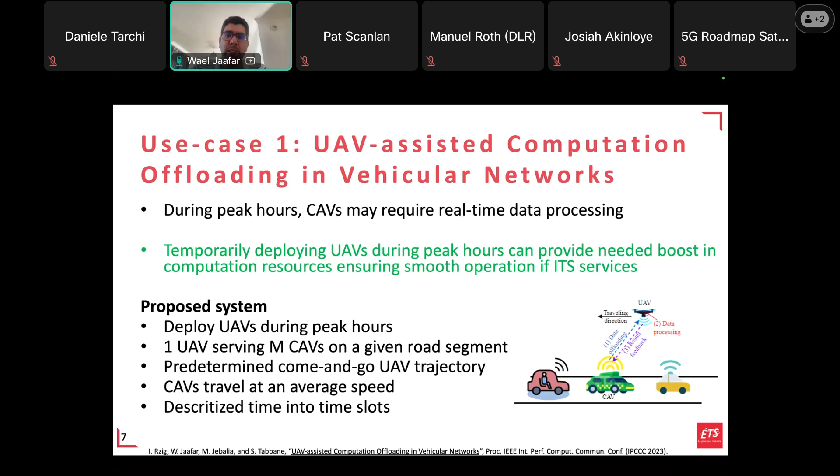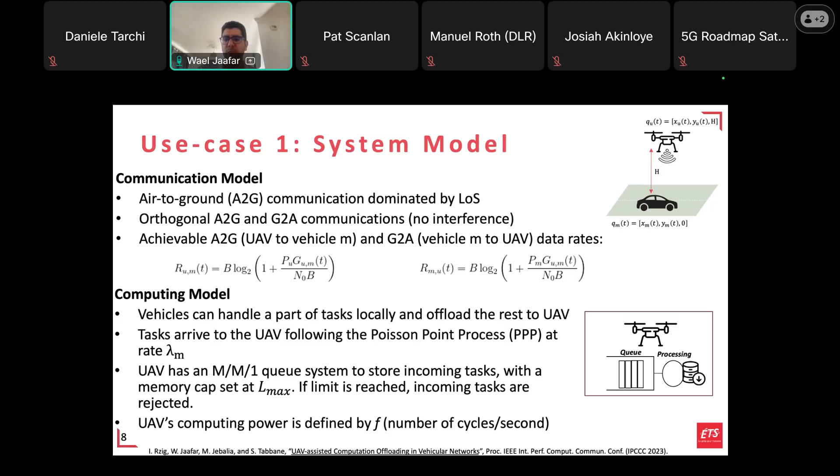What we did here is consider the communication between the drone and the vehicles. We considered a dominant line-of-sight link because you don't have obstacles or shadowing between them. And we have a computing model where computing tasks arriving at the drone enter a queue and are processed one by one. We consider the system simple, with first in, first out for tasks.

Based on that, we have to analyze the energy consumption and the delay, because these are the most important things here. For the drone, we have task processing energy calculated based on the processing power defined on the drone. It also needs significant energy for flying from one side of the highway to the other. And then we have the total consumed energy.

In terms of delay, what you see here is the achievable data rate using the Shannon formula. But since the vehicle and the drone are moving at the same time, the distance between them is changing, and because of that, the data rate changes over time.

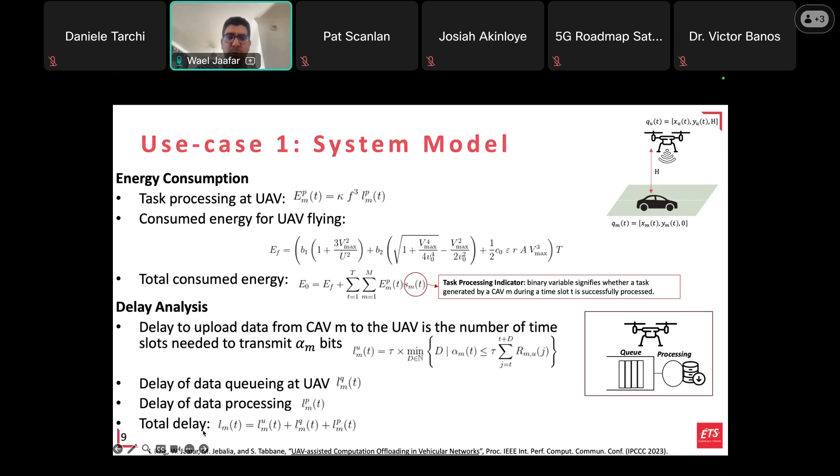So we defined a different way of data rate in order to show that the necessary time that is needed to offload alpha M data from the vehicle to the drone will need to go through a certain number of time slots. So here, of course, we assume that time is discretized into time slots. And then you might have a delay for data queuing, because you might have many tasks arriving to the drone. And also you have the delay for data processing. And of course, total delay is the summation of all of it.

Then what we did is that we formulated the problem of maximizing the task offloading success ratio at the drone. So without looking too much into the equations, we want to make the drone satisfy as many tasks coming from the vehicles as possible. Of course, by respecting the task offloading delay threshold, which is QM. And of course, by respecting that the whole energy that has been consumed respects some battery capacity value.

Of course, I mentioned that we are not optimizing the trajectory, but the only thing that we are optimizing here is the launching point and the launching direction. So actually here it's the launching point location of the drone and the initial flying direction that it will go. And of course, we need to decide on which tasks will be associated to the drone.

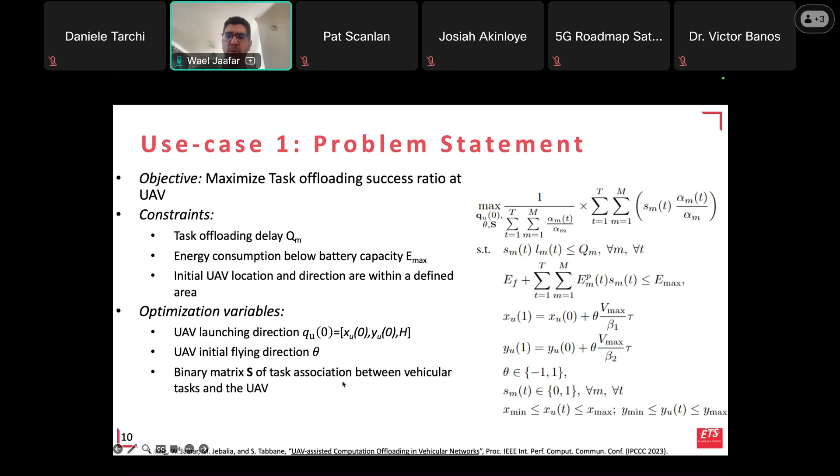So to solve it, we used a simple genetic algorithm task offloading method at first. So I'm not going through the details, but that's the typical solution we have used. Why? The motivation behind it is that a genetic algorithm, even though it's slow in converging, theoretically, if you let it run enough time, it will get you to some optimal or near optimal solution.

And we compared with another, what we call iterative exhaustive linear programming based task offloading approach. So in this one, we have made an exhaustive search over some parameters, which are the launching point and the directions. So we have considered that our segment can be divided into a discrete number of launching points, and we also have right or left direction.

So this was the exhaustive search, and once you fix the initial location and the direction, actually the only problem that is left is deciding on assigning tasks to the drone. And this problem is a linear programming problem. So actually you may use any optimization tool like CVX to solve it.

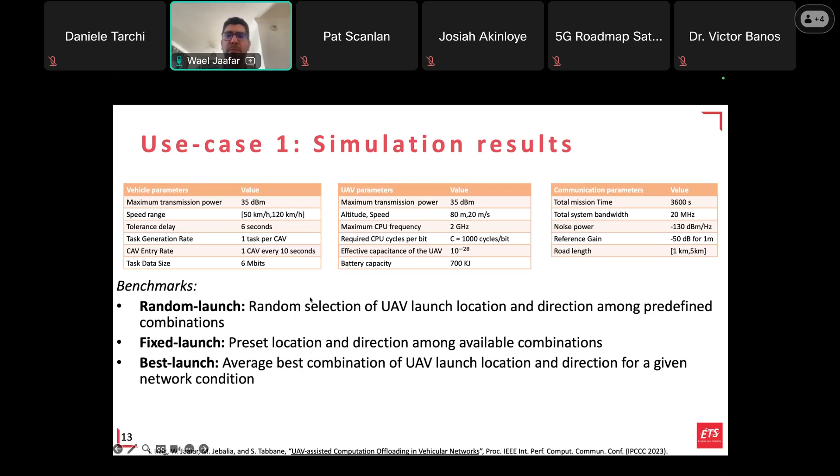So in our simulation, we considered a number of benchmarks where actually we randomly select from where the drone is launched, or actually always preset the same location to be launched. And we took also best launch or average best launch location for the drone. So here we have some parameters. I won't go through all of it due to time limitations.

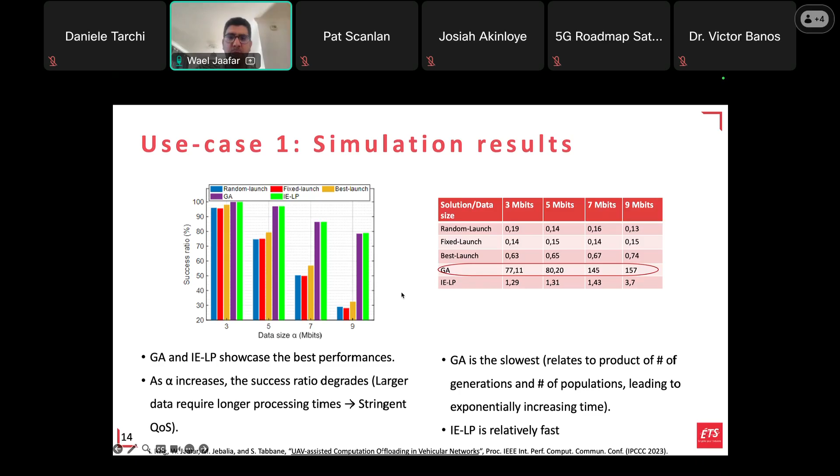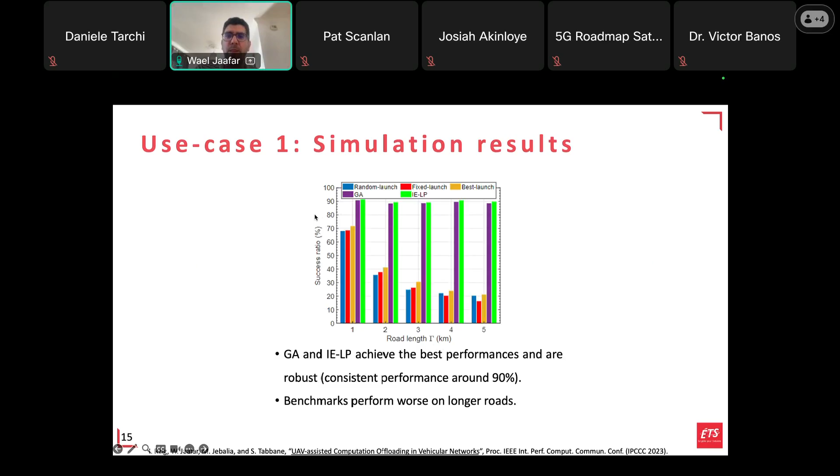We did some more simulations here. For example, different road lengths have been considered. So the highway is either 1 kilometer, 2, 3, 4, 5, with the extremes used by the UAV to come and go. And again, we see that the genetic algorithm and IE-LP are doing great. They are around 90% success ratio compared to the other ones. So that was the first use case with one drone.

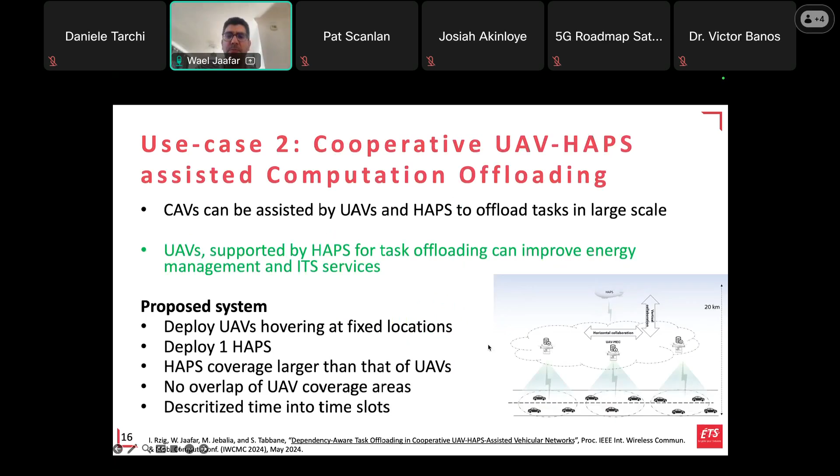So here in the second use case, we complexify the system. So first we considered multiple drones, and we considered that we can cooperate with the HAPS. So HAPS and these multiple drones can support tasks coming from the vehicles. In addition, because of that, there are multiple communication links. So we have the classical communication links with the drone, but we have other communication links between drone and HAPS, and even for feedback between HAPS and the vehicle. So we have more complex links here.

We have considered now not just line of sight. So here we have a probabilistic channel model where you might consider line of sight and non-line of sight links between the drone and the vehicles.

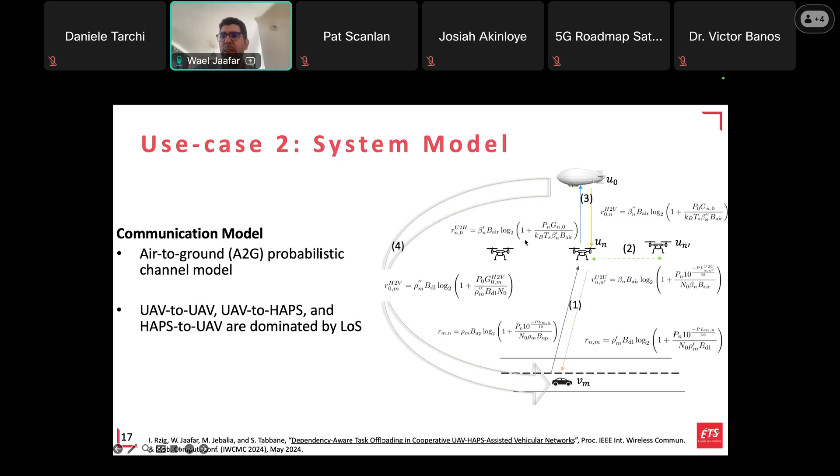And also we have line of sight only for whatever is aerial, between UAVs or between UAV and HAPS.

Here to add more complexity, we considered that a task can be subdivided into subtasks, meaning that to execute a task you have to execute numerous subtasks that have some logical or virtual links between them. So the link can be linear, for example I have 4 subtasks that have to wait for each other to be executed. It can be in parallel, like this way, or it can be hybrid.

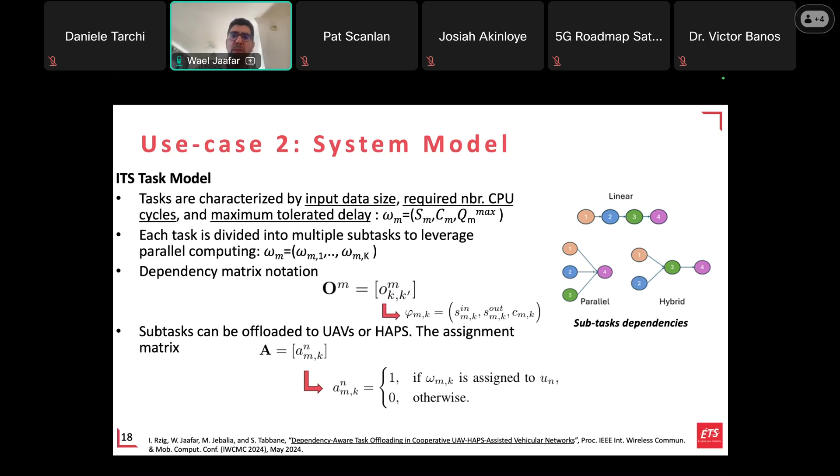This complexifies the problem even more, because now we are not just offloading tasks, but we are offloading subtasks and ensuring that there is the link between them. All of this, of course, will affect the delay of the service. So without going through all of this, just to show you that because of this dependency between the subtasks, you have to account for the time that you are waiting to get the outcome from a previous subtask to execute the current subtask, etc.

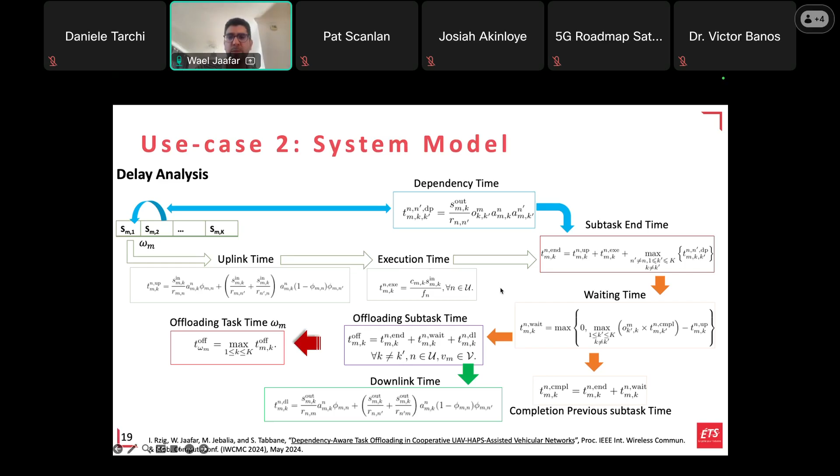So this is just to show you that it's more complex here to calculate the delay. And also, of course, to calculate the energy consumption, we have to account for processing per subtask, plus the energy that we have used here, for example, for feedback. This is something that we added compared to the previous case.

And of course, since vehicles are covered by the UAVs, whenever we have this movement of the vehicle away from the initial drone that was covering it and it goes to another one, you have to account for that in order to get the feedback to the right drone that is covering the vehicle now, after some time. For the HAPS, we have also another equation for energy consumption, which is similar.

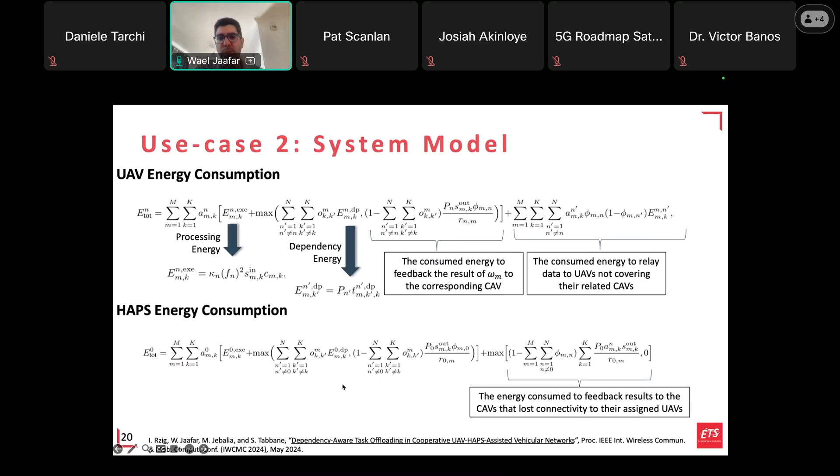Here, the problem is slightly more complex. So we want to maximize 2 things: task offloading, as previously, but also the residual energy of the system, meaning that we want to maximize energy efficiency of the system that is represented by the drones and the HAPS.

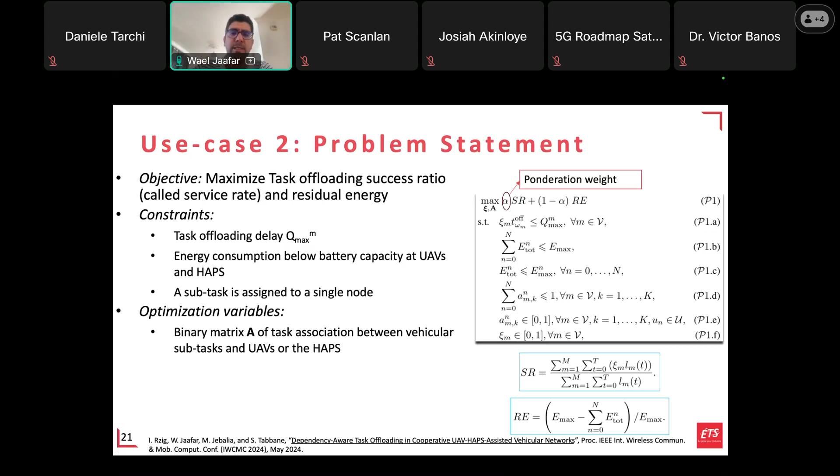Of course, constraints are still the same: the delay threshold, the UAV and HAPS battery capacity, and a subtask cannot be assigned to more than one node. Here, the problem is about task assignment only. So we want to make sure that the subtasks are actually assigned in the best way possible to respect all these constraints and maximize our objective.

So here the solution was based on a genetic algorithm. It is more complex, of course, than the previous case, but we adapted it to our new system.

Without going through all the simulations here, we consider the case with one HAPS, and if I'm not mistaken, we have 3 UAVs. Yeah, I'm just trying to make sure. Yeah, it was not mentioned, but we have 3 UAVs. And then we have some parameters regarding the threshold on the delay. Also, we have divided the subtask into hybrid subtasks here in our simulations.

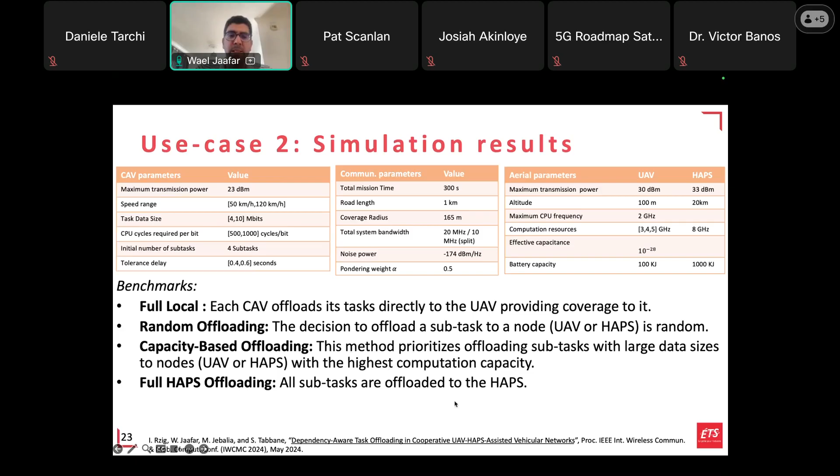Here, benchmarks are different. So we have fully local, where all tasks are offloaded to the UAVs that are covering the vehicles; random offloading, meaning you put it the way you want; capacity-based offloading, where we prioritize putting subtasks in nodes that have higher computation capacity; and full HAPS, meaning we put everything on the HAPS only, so we don't use the UAVs.

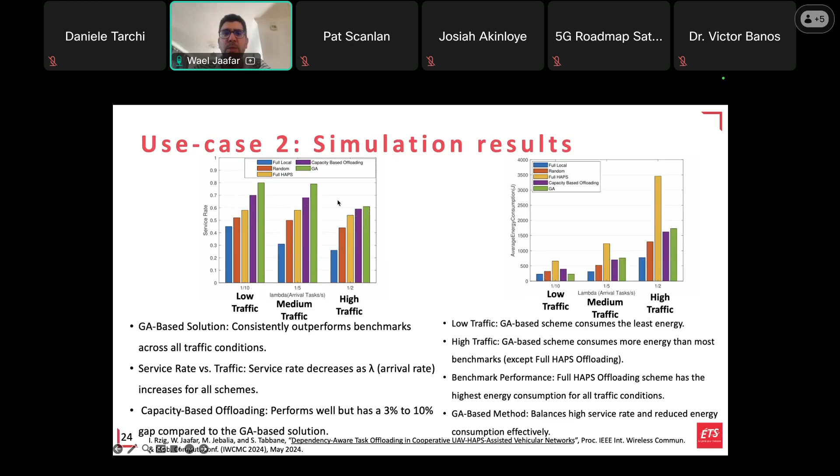And if you look into the average energy consumption, here it's interesting because you see that the genetic algorithm is not so bad. It's not really consuming a lot of energy compared, for example, to full HAPS or the other ones. But of course, this is compensated by the fact that we are satisfying more services or more tasks here.

And here, these are also other results where we considered different subtask division models. So you remember I talked about the linear, parallel, and hybrid models, and here we looked into these differences. In all cases, you see that the genetic algorithm, the blue one, is having the highest service rate, and of course, the energy consumption here is low.

Just to clarify, these results are only for the low traffic case. So of course, if you consider other cases, the energy consumption will be higher. So that was for this cooperation between UAVs and HAPS.

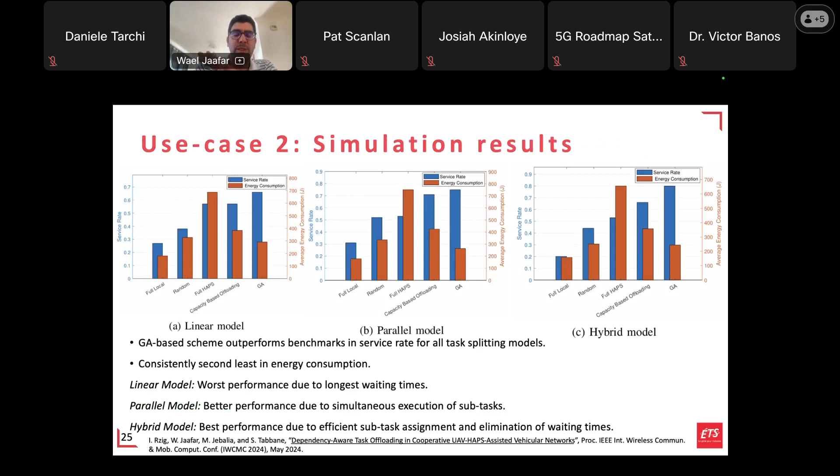And what we did in this final third contribution, we tried to push further the energy consumption by leveraging reconfigurable intelligent surface. Why? Because we can use passive RIS for signal forwarding or data forwarding without really consuming or using an active antenna in that case.

So the idea, if you're not familiar with RIS, is that RIS allows you to steer or redirect RF signal in a controlled way in the direction you would like. So you can do beam focusing, absorption, imaging, scattering, and polarization.

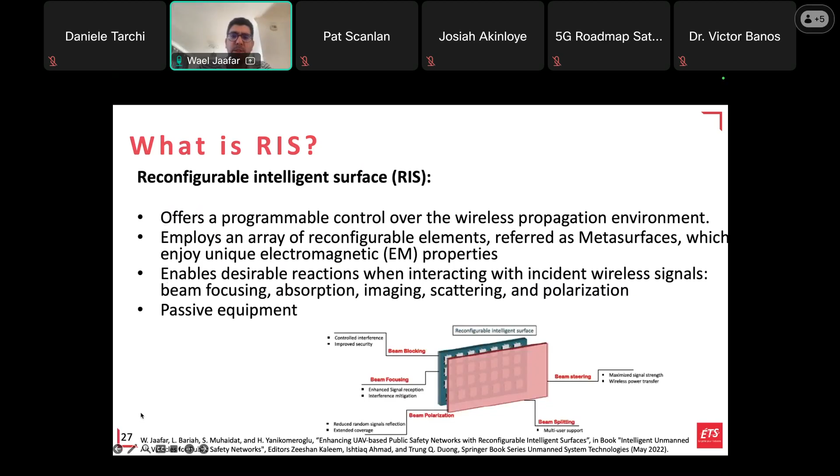And the idea was to equip these aerial platforms with the RIS. We launched this idea a few years ago in our group, and we proposed to equip RIS on the drones, on the HAPS, on satellites. And also, we did some link budget analysis about it to see if it's feasible. And the short answer is yes, it is possible to use it.

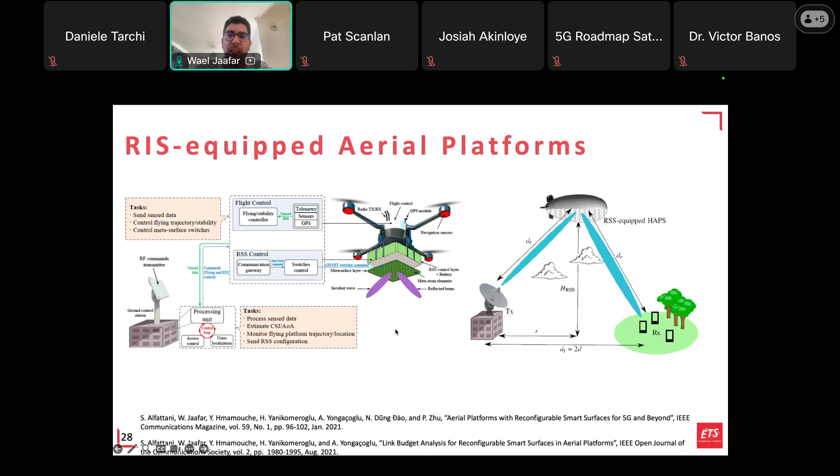And this is what we leverage here in our new system. So here, we consider that our drones also have RIS. So actually, they have active antennas, they have RIS, and they have edge computing. And the HAPS here, to make it simple, we didn't consider that it has RIS. So it only has antennas and edge computing.

So now you have this more complex operation because you have different modes that can be used at the drones, either as an edge server, RIS-based relaying, or active antenna relaying, or transmitting or receiving.

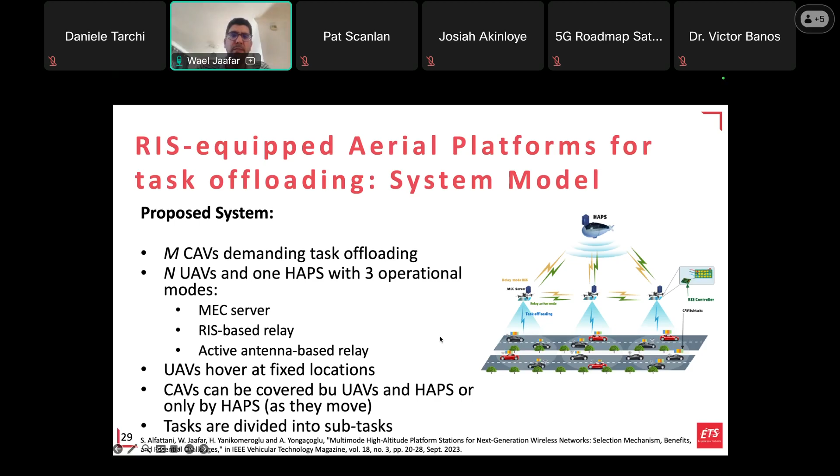So the same assumptions are kept here compared to the previous one. The same task, also division into subtasks, have been considered. But here, because we have the RIS, the communication model is slightly different. So we have direct communications when we use the active antennas, but we also have this relaying through the RIS. We consider that the RIS can relay the signal coming from vehicles to other UAVs or to the HAPS for processing the tasks.

Without going through all these details, I would just talk about this example. So here we consider that we have subtasks 1, 2, 3, and 4, and the assignment has been done into different nodes between UAV1 and UAV2 and the HAPS. So here, because of this architecture of the subtasks, you need to execute 1 and 2, then you need to send the result to number 3, and then send the result to number 4, and send it back to the vehicle.

And we had to account for all this communication, all this processing for the end-to-end delay. So this is what we did, and of course, including the queuing time.

The objective is very similar to the previous one. So actually, it's almost the same thing, with the difference being that when we calculate the delay, we have to account for what happens with the RIS. So if we are using the RIS, then we have to account for it.

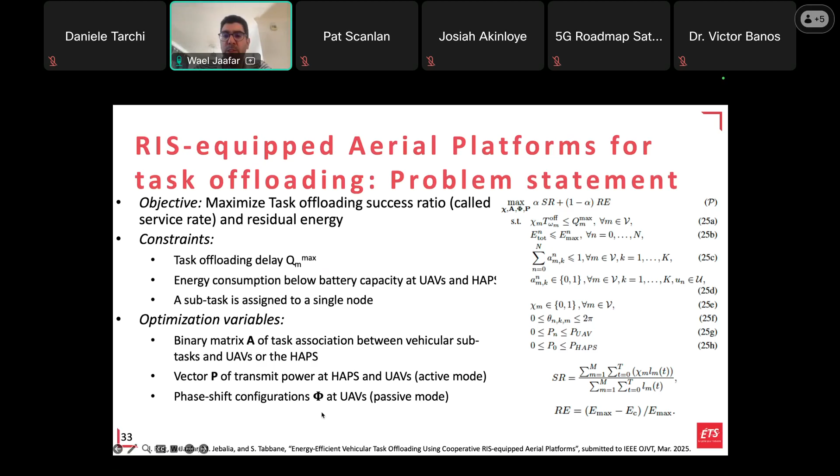And here, the optimization parameter is not just about assigning tasks, that was the previous parameter that we had to optimize, but also we are optimizing the transmit power at the HAPS and the UAVs, because they need to send the outcome of a subtask processing to another node. And of course, we need to look into phase shift configuration at the RIS that is used on these UAVs.

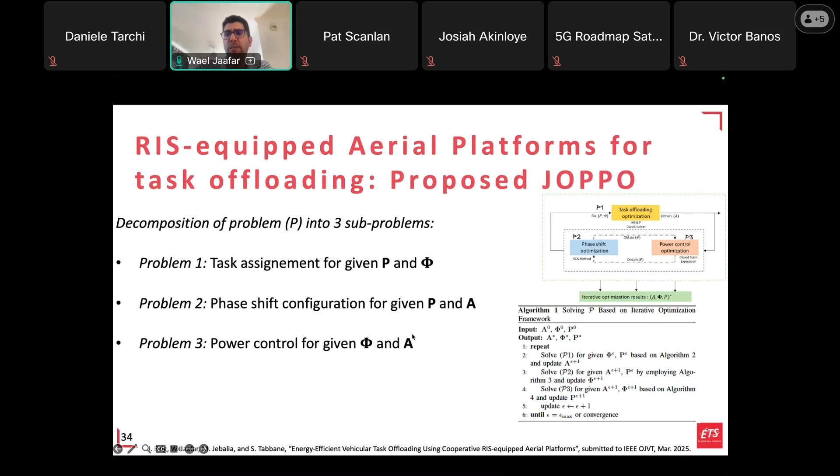So because of this complexity and that we have many parameters to optimize, we adopted an alternating optimization approach where we fix some parameters and optimize the last one. And we did this in an iterative manner, between task assignment, phase shift configuration, and power control to get the results. So we had to solve these sub-problems separately at first.

The first one is about task assignment, assuming that power and phase shift have been given or fixed. The problem is nonlinear, so we have to linearize the constraint, introduce some slack or auxiliary variables, and apply McCormick relaxation. So we changed it to mixed integer linear programming, MILP formulation, and then we solve it with the Gurobi optimization tool.

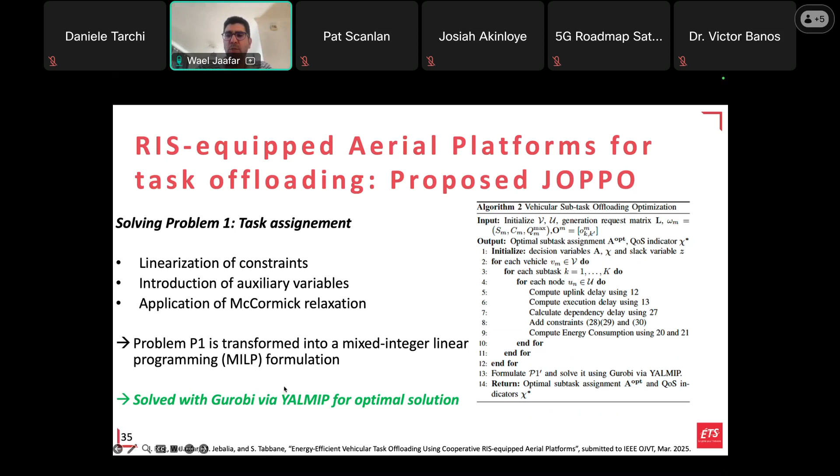For the second one about phase shift configuration, we applied successive convex approximation after transformation into a positive semi-definite matrix for the phase shift expressions, and then we applied EVD to extract the phase shift configuration. So once we get this, we just solve it using CVX.

And the third problem for power control, we derived a closed form expression for power control, for power allocation, based on the constraints that we have to respect. So mainly, we need to have enough power to respect our deadline, the delay constraint, and of course, with respect to the maximum power that is available there. So we derived the expression. I'm not showing them here, but we derived them and used them for power control.

So these are some parameters. I'm not going to go through it again, but we have 1 HAPS, 3 UAVs also in this case.

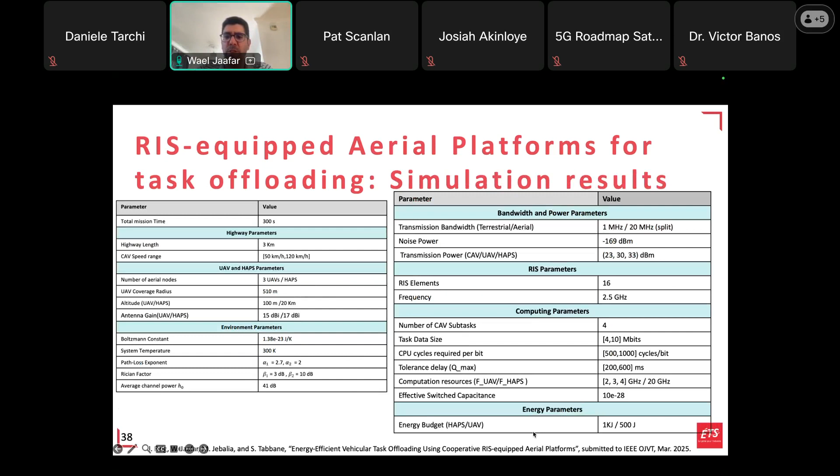And we consider a different energy budget for them and a different CPU power. The benchmarks are slightly similar to previously.

This one, random phase shift, is exactly the same as what we propose here with alternating optimization, but we didn't optimize the phase shift. We only optimized power and task assignment. Full HAPS is as previously.

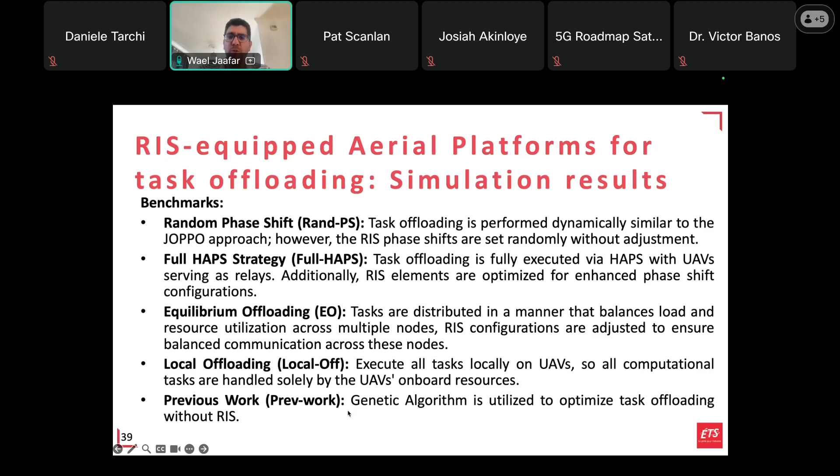Equilibrium offloading is a heuristic that makes sure we have balancing of task offloading to different nodes in the network. Local offloading is offloading only to the UAVs without the HAPS. And previous work is actually what I showed you before with the genetic algorithm, but without using the RIS.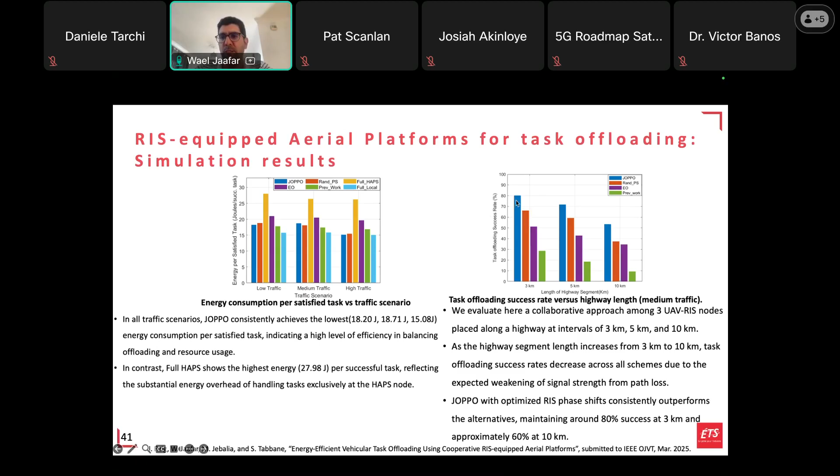We also looked into performance with the length of the highway. This is similar to previously but with the RIS. The success rate is also very good with our method compared to the other ones.

To conclude this presentation: we have robust approaches for dependency-aware task offloading in cooperative aerial-assisted vehicular networks. We took advantage first by using aerial platforms, then by adding RIS within the UAVs. This multi-mode operation of drones with RIS, antennas, and edge computing would become mainstream in the future.

But of course, these results are for offline, so they give a reference performance. The idea is really to deploy it online. If you deploy it in real time, you would look at different approaches, maybe involving multi-agent systems, reinforcement learning, or other approaches. Thank you, everyone, if you have any questions.

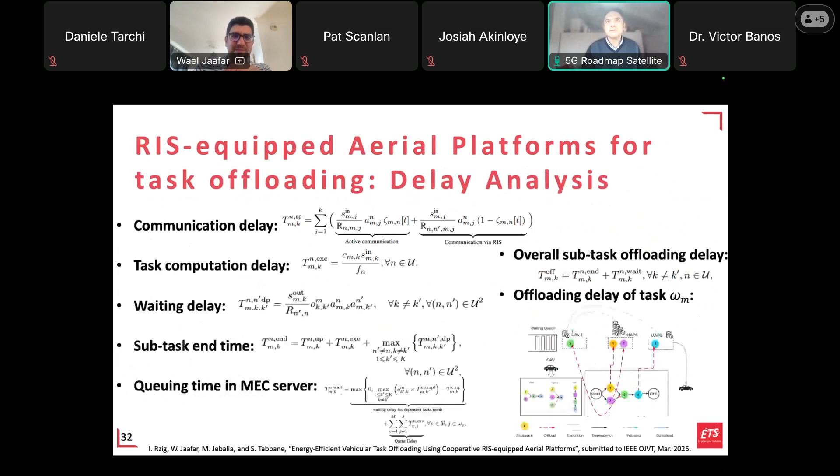Yes, so the first use case, when I mentioned using UAVs in a temporary way, is mainly because we want to support vehicles where you don't have, for example, roadside units to provide navigation information, like if something is happening, some accident on the road ahead, and this information you are not getting.

So that's the connectivity part. But there's also the part related to tasks or edge computing. It depends on what's happening on your vehicle, because if you use your server and vehicle power for critical and non-critical services, and even dedicate some power to help other vehicles via V2V communication, at some point you might lack enough power to process images from the cameras around the car, to detect objects and obstacles.

Or even if you have a failure in your own server, the communication part would still be working. So your cameras are still collecting video or images, but you don't have enough power to process it. That's why we leverage these non-terrestrial nodes to do that.